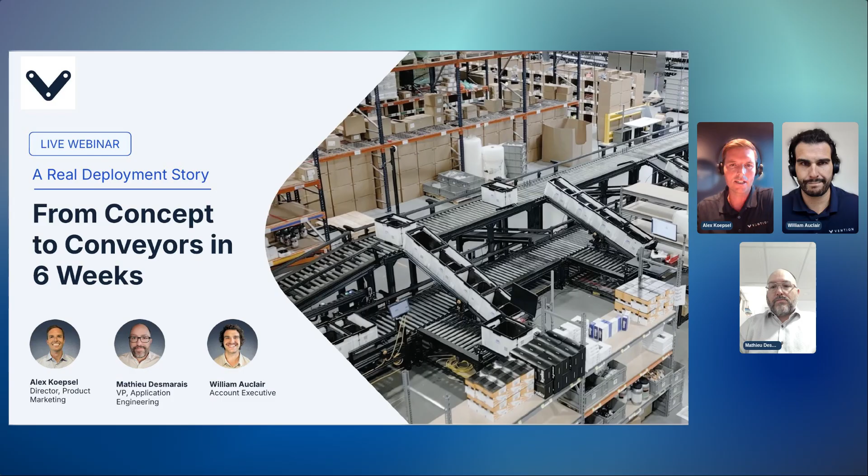Let's get started. And the first question we have is just to kind of set the stage and context. This question's for Will. Who exactly is The Feed? Yes, so The Feed, it's a fast-growing e-commerce company. It's focused on performance nutrition. So think energy products, fueling products, especially for endurance athletes, such as cyclists, runners, and those sports have been booming in the last couple of years. I'm thinking of other sports, maybe more niche, HYROX. So all those fueling strategies, they sell those supplements at high volume.

So from an operation standpoint, they run this high volume fulfillment business where the speed and accuracy of their orders are critical. So they're really customer centric, if I could say. And at the end of the day, they're not just selling products. They're not just distributing products. They're selling fast, and they have reliable delivery for their customers to have a great experience.

Got it. And with this high volume growing business, why were they looking for automation? Why did they come to us in the first place? Did they have specific goals they were trying to accomplish or challenges? What was going on in their business that led them to automation?

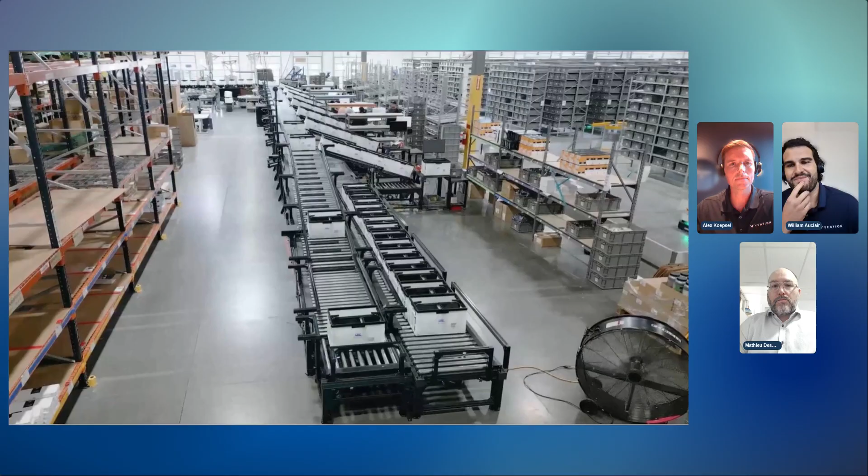Yeah, so from my point of view, at least, I'm not running their business, but I think like many fast-scaling e-commerce businesses, they hit a classic inflection point. So growth started to outpace their operations. The order volumes were increasing, and their manual processes with them were increasing, especially between the picking, packing, and shipping areas. So those areas became bottlenecks. They weren't inefficient, but they were simply outgrowing their current setup.

And the real challenge wasn't today's volume, it was preparing for what's coming next. So the next big marketing event. We all know during summertime, let's say they have a big marketing stunt for the Tour de France. So they had a lot of orders picking up, and they needed to come up with faster fulfillment, and that's why they drove automation with Vention.

Do you know roughly their manual process, how many people they had doing this process before automation? Yeah, so right, they were actually for the packaging where we help a lot. They relocated more than 15 people, so there was a lot of manual process. So people walking in the facility to go from picking to then auto boxing.

So we bridged the gap between two, let's call them semi-automated process, and with our conveyors we bridge that gap. So those 15 people were just relocated to more high value process, and they were able to scale that way. I think they close to double their volume, so they increase their throughput while maintaining the flexibility of their operations.

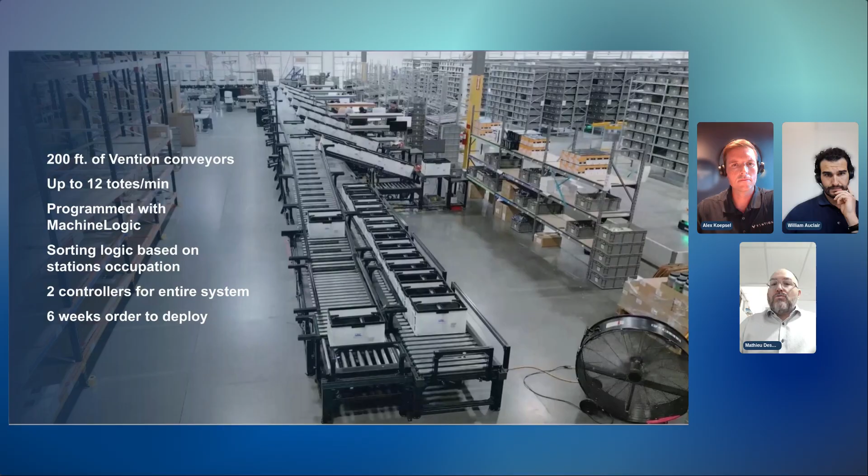Consequently, the physical design and how it's programmed: where do we put eye-level sensors, low-level sensors? Which buttons do we make available for the operators? Which light signals do we make available for operators to know that they are a bottleneck on the line? These are all things that evolved as we were building.

Consequently, having parts in stock, having an environment to program the solution that is easy to use, easy to simulate. If you go back to slide 5 or 6, where you see the simulation. Yep, that one. It's literally how we work. We simulate the changes in the programs. We can push the buttons virtually in the digital twin to see the impacts of the programming changes.

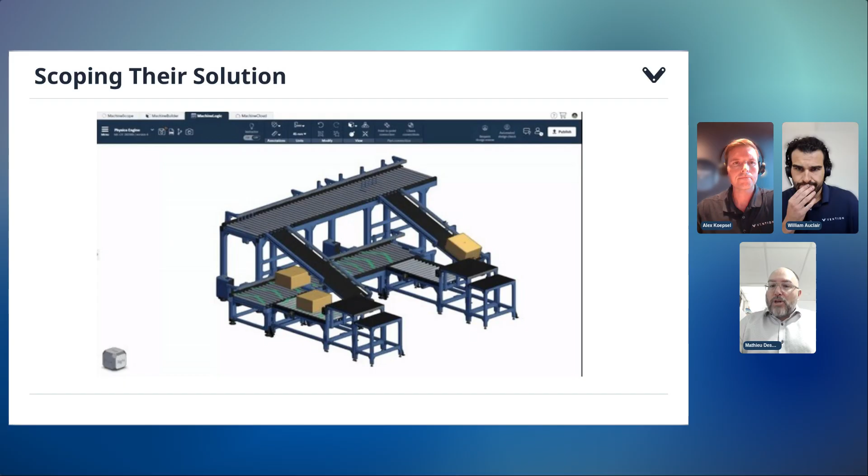And we achieved that by putting parts on the floor at the feed, 6 of the 7 stations, and we kept a 7th station in our commissioning facility in Montreal in order for us to have also a physical twin to replicate the actual behaviors on site until we came to completion of the solution and shipped the 7th one to complete the project. Got it.

And you talked a little bit about being on site and the commissioning process. I was showing this slide, just a diagram. Well, maybe one question, part one of the question is, what is this diagram people are looking at? How does our team use this, or how does this help the client? And then 2 is the picture on the right. I see a kind of industrial PC looking box. Maybe what is the value of using something like the controller versus the traditional approach of PLC? So 2 parts to the question.

Yeah. Well, on the left side, that's the evolution. This is what the feed came back to Vention this year to upgrade their system. On the initial solution, we saw AMRs bringing totes to the operator stations individually. They've decided to automate this with a large loop of conveyors to bring the product to the operators so that they can build their orders. So essentially we've doubled the amount of conveyors. Again, in a very similar fashion, contract established in January, and parts are already there since March. In fact, the build has begun.

What you see on the left is the HMI. I speak a lot of the controls being Vention controls, and that's the industrial PC that you see on the right side. That's Machine Motion AI. It's literally a picture of the installation in our commissioning department of one of the stations. That's our controller. It's got an IPC in it. That's how we program things. It's got a safety PLC in it. It's got power distribution in it. And we connect it to our own pendant, a Vention pendant, which acts as the HMI. And that's what we see on the left side.

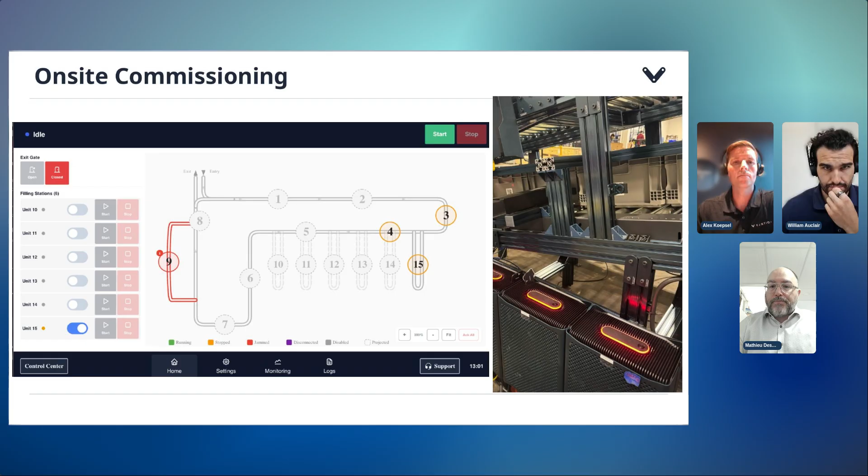Got it. And then what is the value, like if we were to compare the PLC approach side by side to the Machine Motion approach, what's the takeaway for people looking to deploy conveyor systems like we showed with the feed? Well, I love this image because it makes it relatively tangible to understand what Machine Motion AI is. It's our controller, as I just described, and it's off the shelf. If I want one tomorrow, I can just ask Vention and get one tomorrow. You can program this in a no-code environment called MachineLogic or in Python, none of which are a black box, right? You can just program it as you want.

And it's got a safety PLC, so all of the safety components, as we see on the right side, with the e-stop and the pendant, and its power distribution. In the case of conveyors, up to 32 motors can be powered by one Machine Motion. In the case of the feed, I think there's 2 Machine Motions to power the whole thing. Again, all of which are identical. They're all the same Machine Motion part, off the shelf and available.

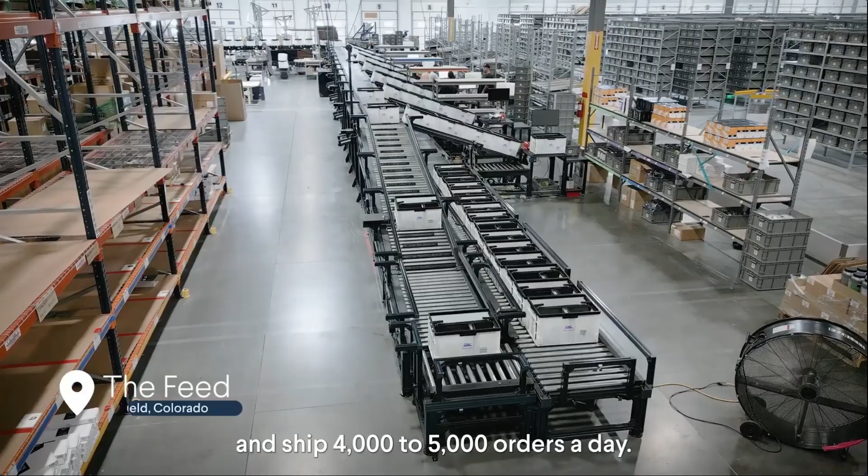Matt Johnson, CEO of The Feed. We're the largest online marketplace for sports nutrition for endurance athletes in the world. Now we have over 5,000 products and ship 4,000 to 5,000 orders a day. We reached our limit of what we could do from a manual picking standpoint probably over a year ago, but it took us a while to get all the systems in place.

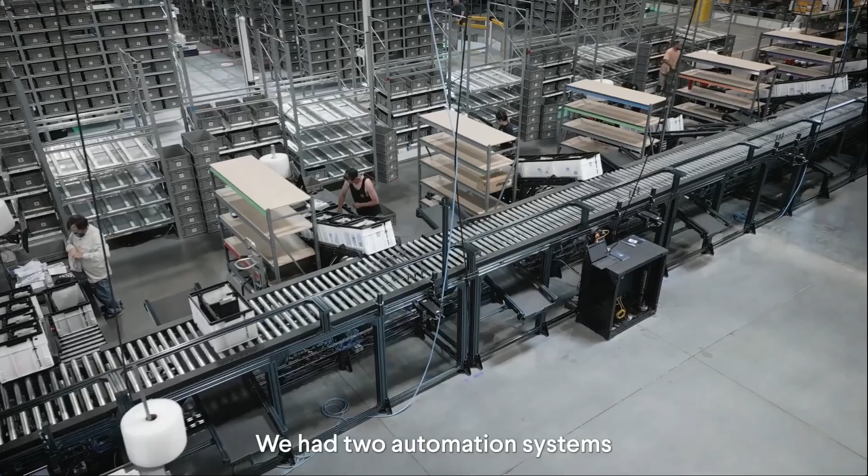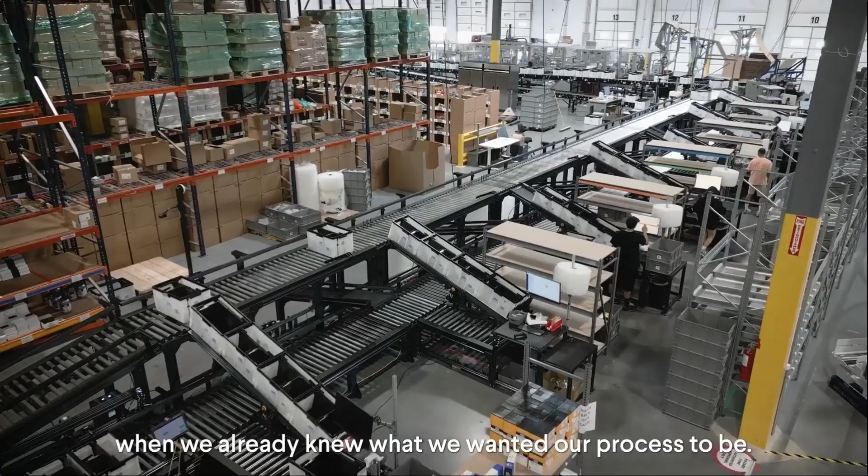And so we had 2 automation systems that we knew were the right fit for us, but we needed to connect those 2 systems together. And we spoke to all the traditional conveyor companies, and everything was about how we could change our process to meet what their capabilities were when we already knew what we wanted our process to be. So as soon as we spoke to Vention, they said, yeah, we'll build our system to how you need it to work, and we'll build it in 6 weeks. And it was a very easy decision.

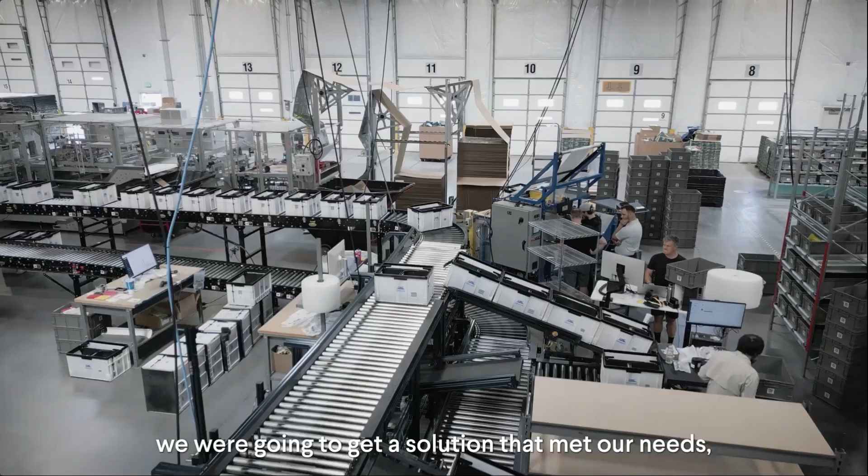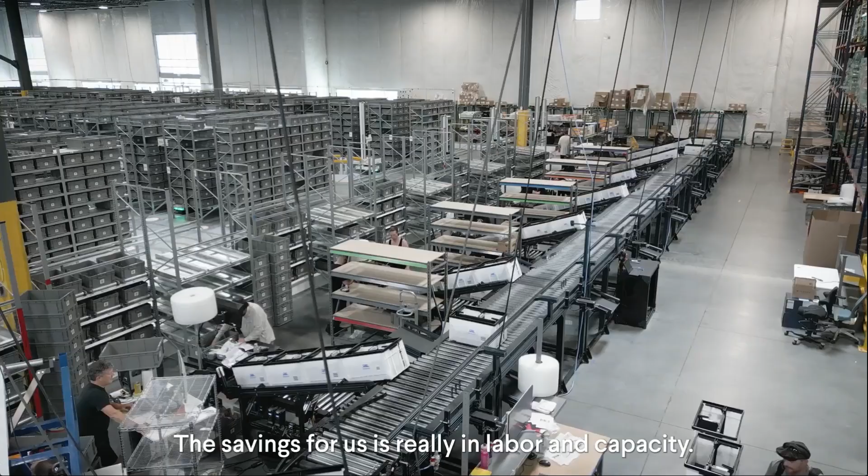Our team started with the machine builder to build out our prototype, or sort of proof of concept idea, which was excellent. And it really gave us the peace of mind that we knew what we were doing. We were going to get a solution that met our needs. And we knew this was basically automation Lego that we can take apart and click back together any way we want. The savings for us is really in labor and capacity. So we can run about 600 orders an hour through this system.

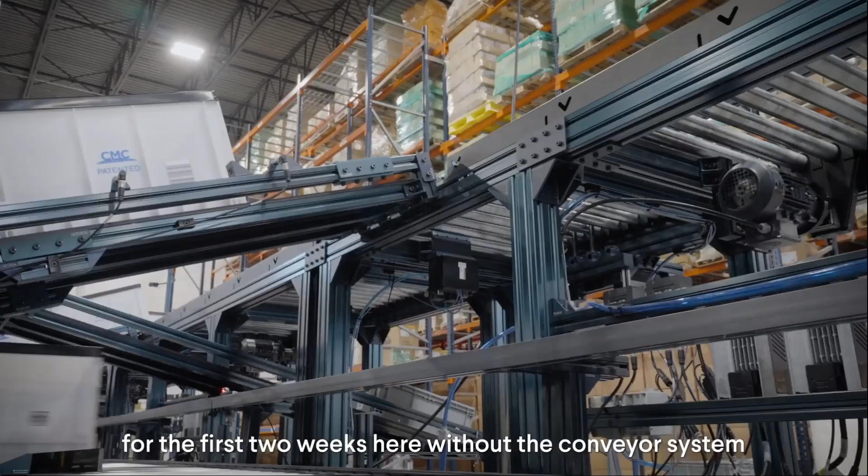The ROI, I can tell you, is significant because we actually operated for the first 2 weeks here without the conveyor system. And I would say we were running 15 additional staff just managing the process of what the conveyor has replaced. I think the delivery timeline was spectacular. There's no one in the industry that was anywhere close to it. I don't mean like they were twice as fast. I think Vention's was literally at least 6 to 8 times faster than anyone else.

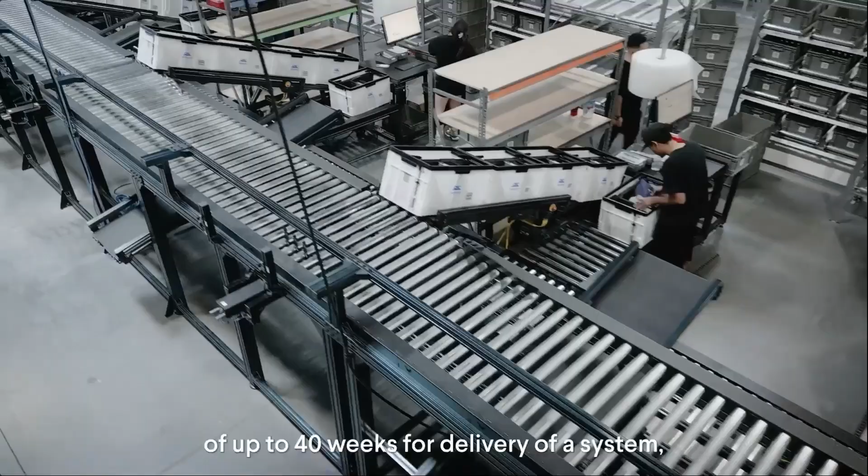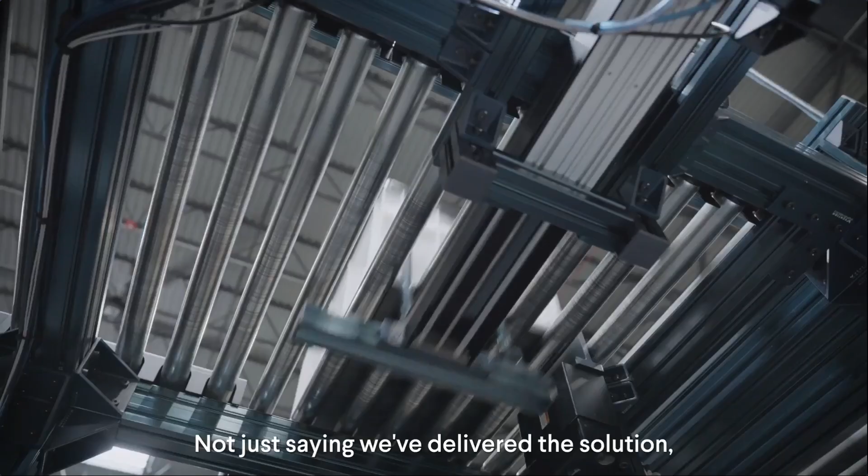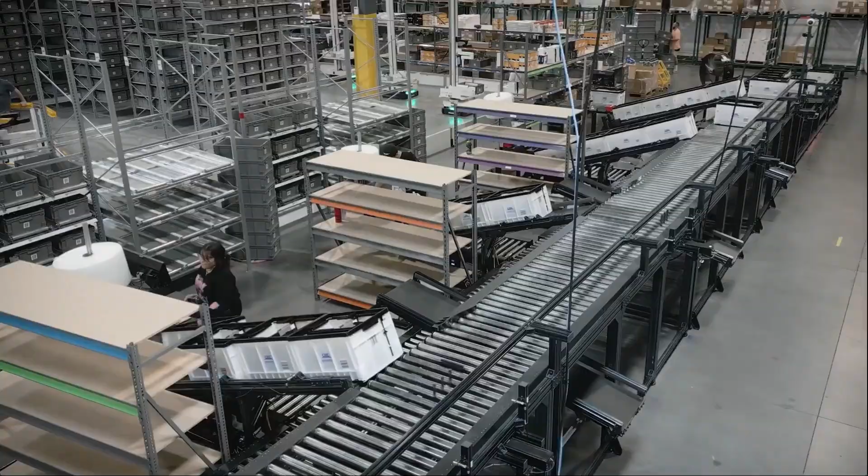We were getting quotes of up to 40 weeks for delivery of a system. And Vention had it fully operational from contract to inside operating in 6 weeks. Not just saying we've delivered the solution, they really focused on delaying our acceptance testing until everything was perfect, well beyond any other vendor I've seen who want to get in and get out. They said, listen, we're going to stay here until this thing is perfect. And they have, and that's why we'll be back as a future customer.

All right, let me change the view so we can see you guys again. All right. I think that kind of summed it up. I mean, we have plenty of time for Q&A. Want to get to that and answer some questions.

But first, Will or Matt, whoever wants to go first, kind of taking a step back, what would be your advice for someone who has a project like this or similar? What's the one thing you would tell them to make sure they're successful in their project? Yeah, I can take that one, and I can even go a step back and piggyback from what Matt mentioned about deployment and commissioning, because it's tied to the results after.

So I think one of the big advantages, and I won't quote Matt Johnson again from The Feed, was the speed and simplicity first, because like we mentioned a couple times, the system is modular, the deployment was fast and didn't require disruptions to their operations. So we were able to install and get them up and running quickly while supporting the team through the transition. So this really helped the team to understand what they were operating at the end of the day. They needed to understand our system, the conveyor system.

And I think the goal is always the same. We try to get value in production as fast as possible. And we did it not in months, like others quoted, but weeks. And to come back to your question about the results, Matt Johnson replied to this really well. The results were very tangible because they improved the throughput, so the number of orders per day, and reduced the manual handling. With the 15 operators I mentioned, they were able to relocate them to more value-added operations, and that created a much smoother flow across their fulfillment process.

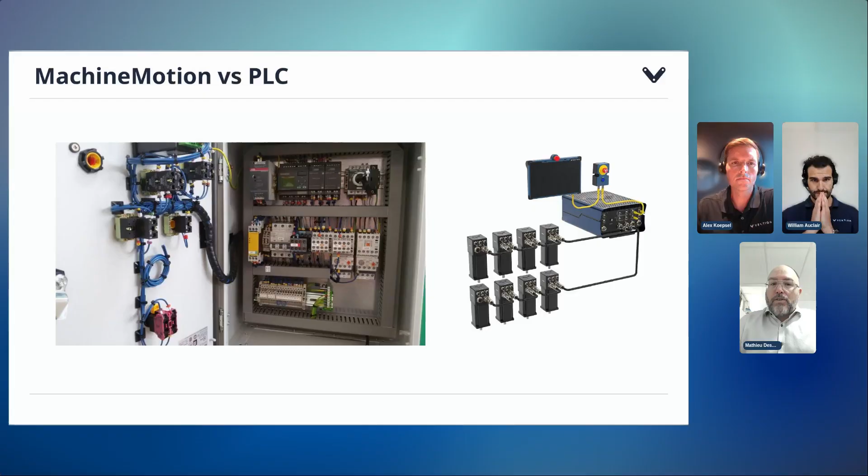If I can abstract this a little bit more, I think what's key in such projects is to select the right partner. In this case, a design and build approach, you want a partner that I like to say is a single neck to choke. Somebody that has control over the selection of the hardware, of the people, of the solution, in order to be able to design, build, adjust, support for the whole duration of the project, but also the total lifetime of the equipment.

Today, in April, we are retrofitting what we have delivered to the feed into a generation 2 of the solution. And that's because we're one neck to choke. In this case, I believe it makes Vention the good partner for what they had to do. So that's my recommendation. Pick the right partner that has control over what's going to be important in the design and construction of your automation solution.